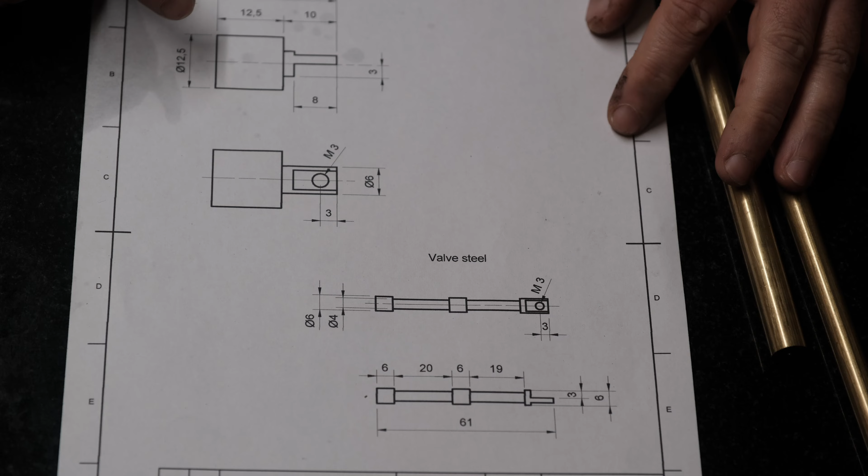Piston, valve, got some brass, let's build it.

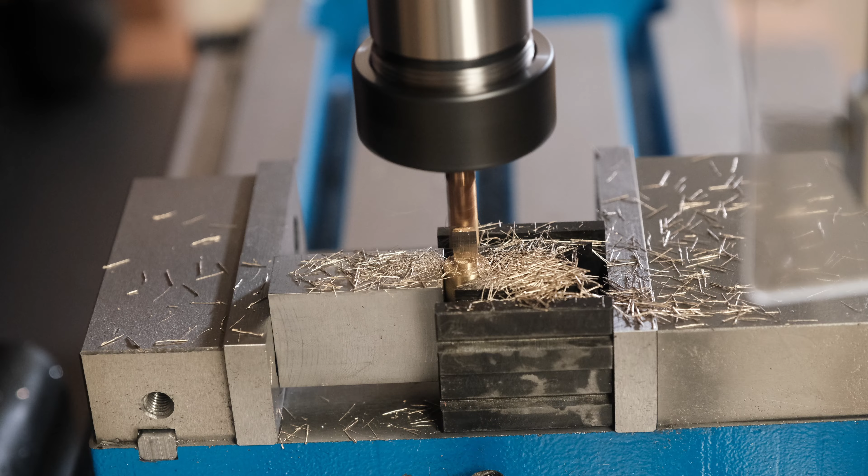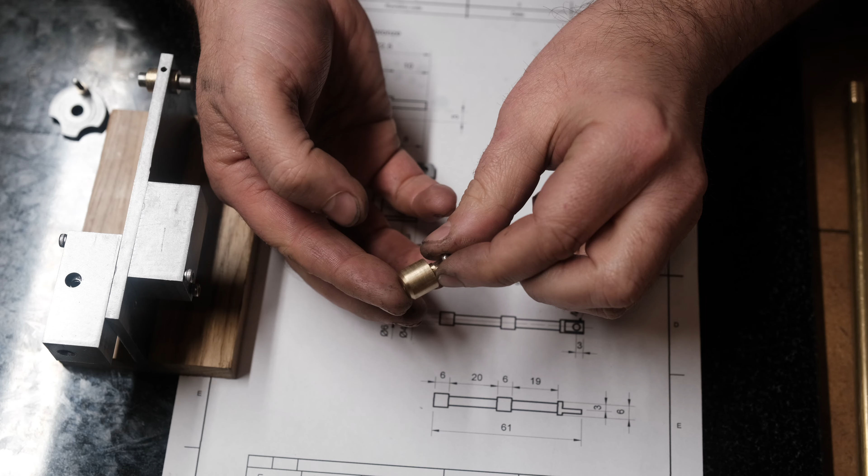So I just need to side mill half of the 6 millimeter diameter down to 3 millimeters directly in the middle. And then I'll just make the other side a flat edge as well. So let's do that now. So now I just need a 2.5 millimeter hole for an M3 thread. Piston's looking good, seems to work okay, fits in the bore okay.

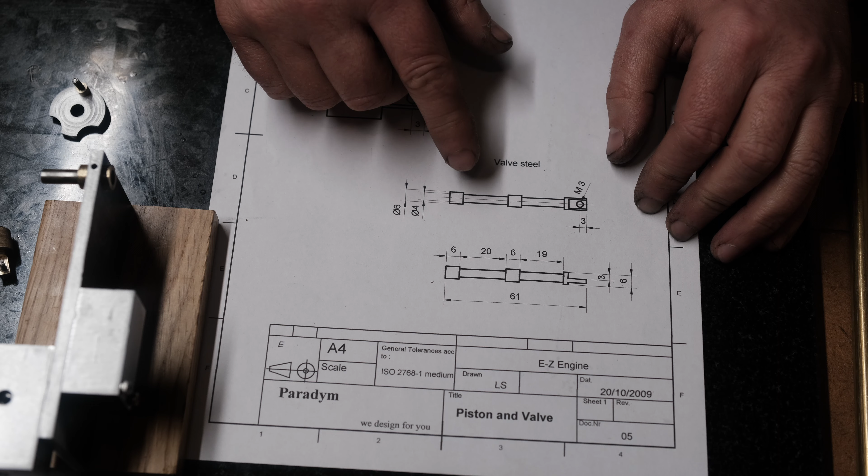So the next piece we have to do, the final piece, is the valve. It says to make it out of steel, but I'm going to make it out of brass just because of the colour I prefer. It shouldn't make that much difference to a steam engine like this. So let's jump on the lathe and we'll cut this out. I need to be quite accurate with the dimensions on here.

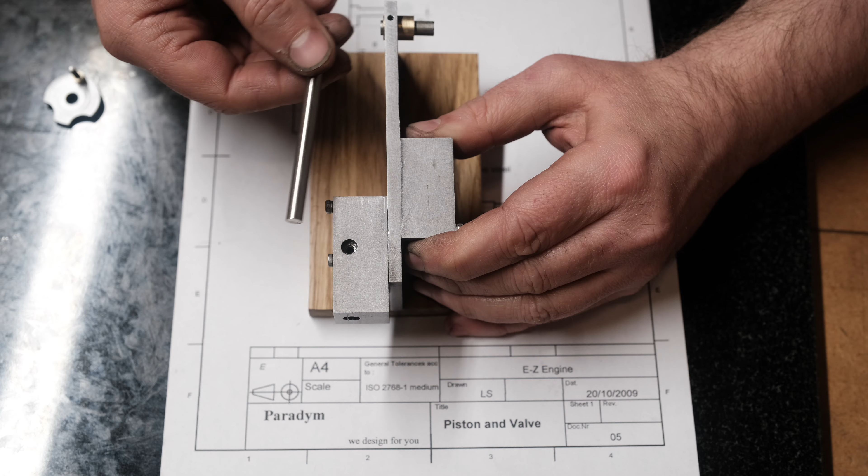Actually, a slight change of plan. I'm not going to use brass. I'm going to use one of my stainless steel rods. That'd be perfect for that. And it fits perfectly in there. This is already a 6 millimeter rod. So that's going to be a lot easier, and it's already polished, so it's nice and smooth.

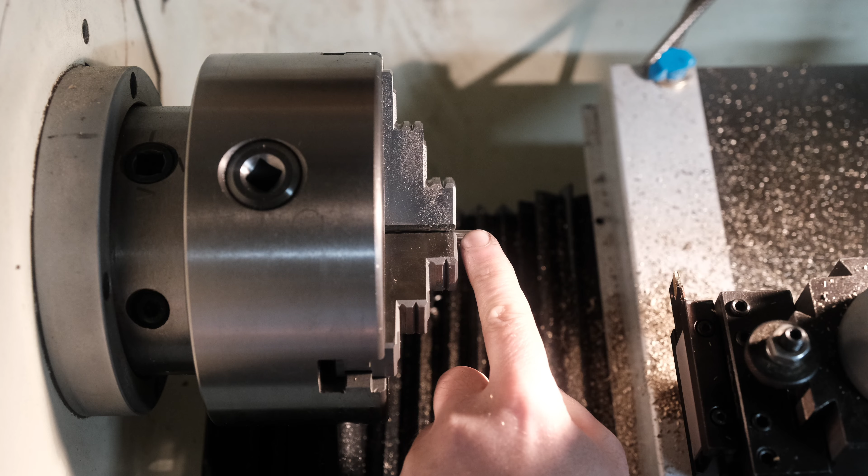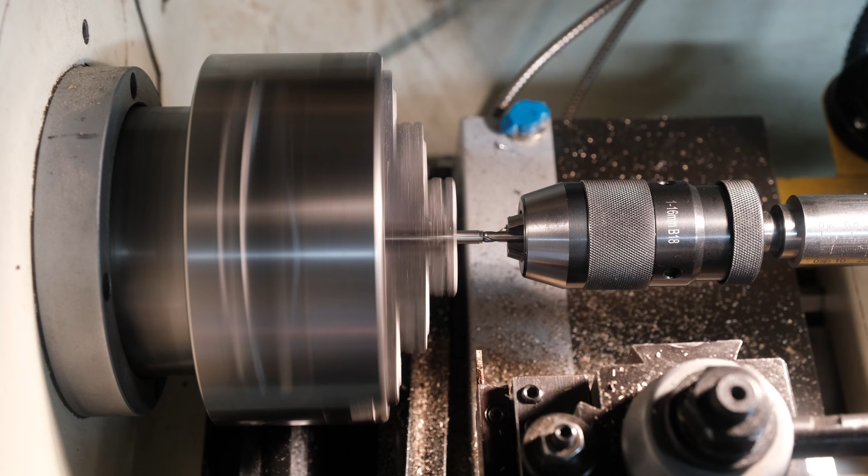So this actually needs to be 61 millimeters long, and that's way too much stick out. So what I'm going to do is put a center in it, and I'll try and do everything in one go, but with a center, because it's going to be hanging out here. I'm going to try and do this with the parting tool just because of the straight edges on each of the barrels, but there's a lot more stick out than I would have liked to make room for my centre. I can't get close enough otherwise, but I'll just have to do it like this, and then I'll clean up the end later.

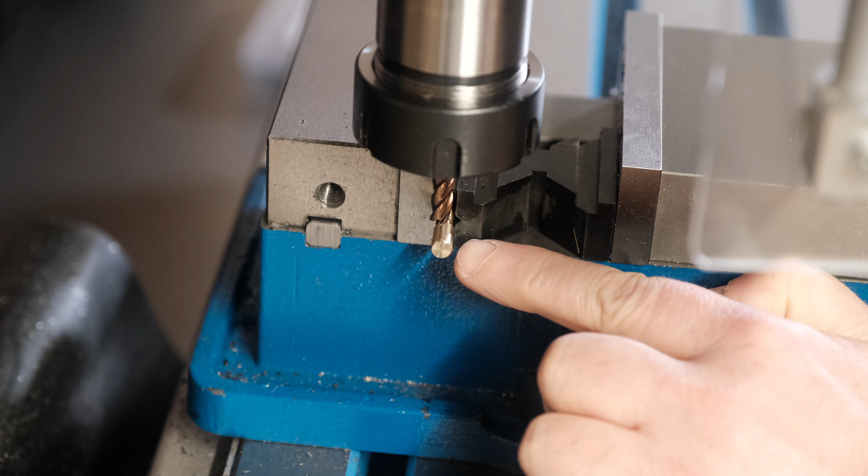So you may notice I've changed to brass rather than stainless steel. I'll explain that in a minute, but what I'll do is I'll just put the flat edge on this and put the hole in, so let's do that.

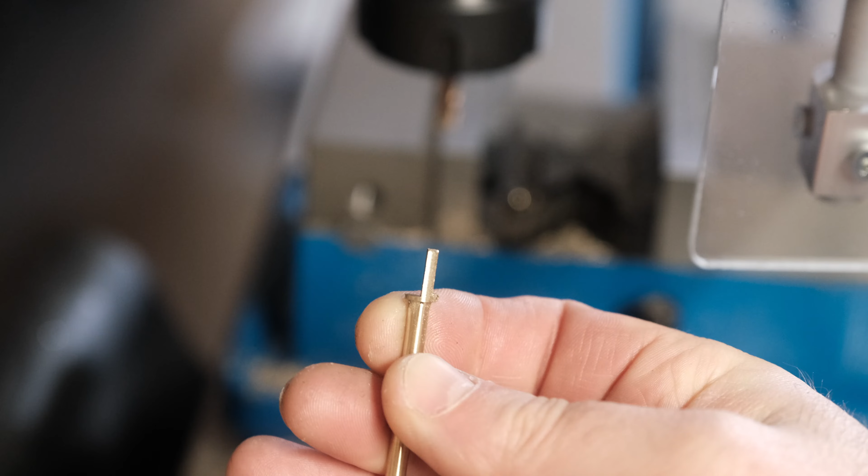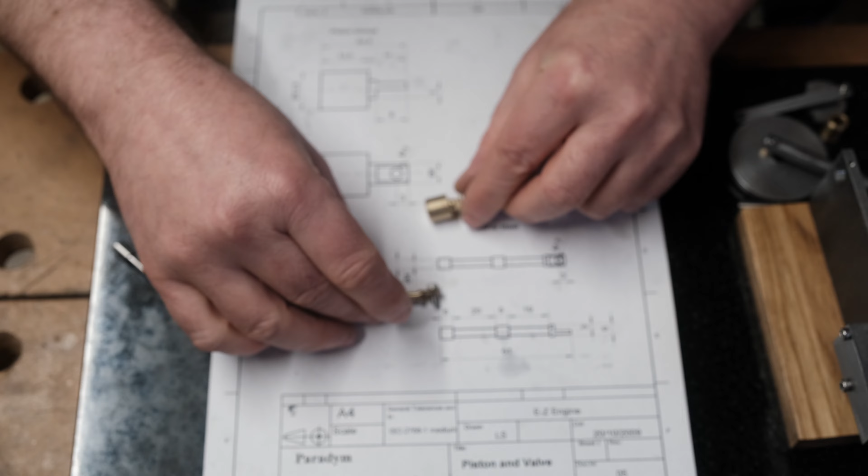So I've completed the valve and the piston. These are looking pretty good. They fit really well. I ended up going for brass in the end for the valve. And there's a specific reason. I always forget. I'm not very experienced with cutting stainless steel. And I think it just work hardens too hard and it just causes odd mistakes and it starts to bend and it just doesn't cut very well.

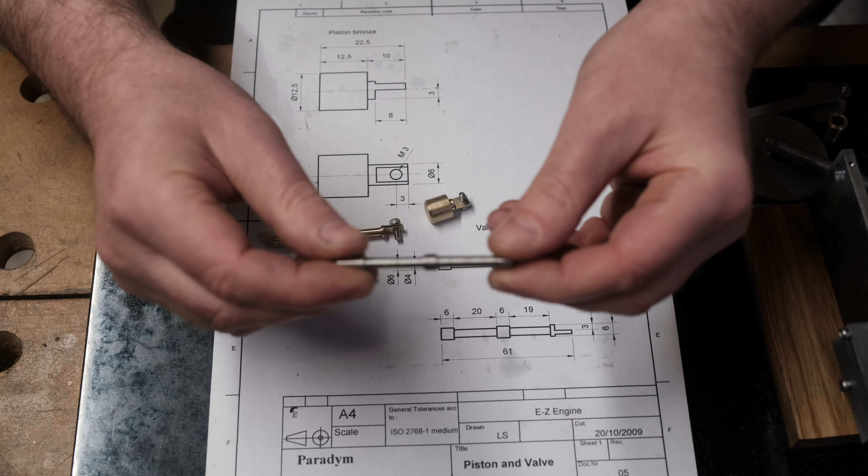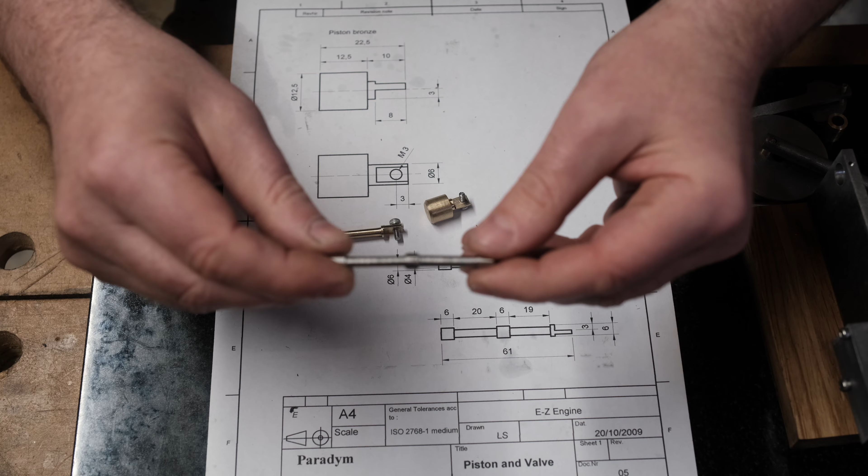What I've found is when I've been practicing stainless steel, it's always much easier to use bigger pieces and take deep cuts relatively quickly, just so it doesn't seem to work harden. I think that's what's happening because you start cutting and it seems really easy and then literally within a second or two, it just suddenly doesn't want to cut anymore. So I think that's work hardening. But if anyone knows for sure, let me know. So I gave up with the stainless steel in the end. I wasn't happy with the finish. So I just made it out of brass and that works perfectly fine.

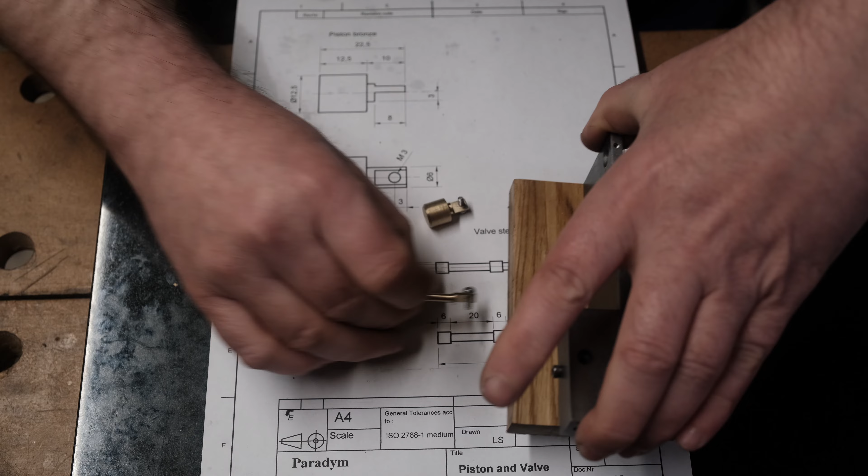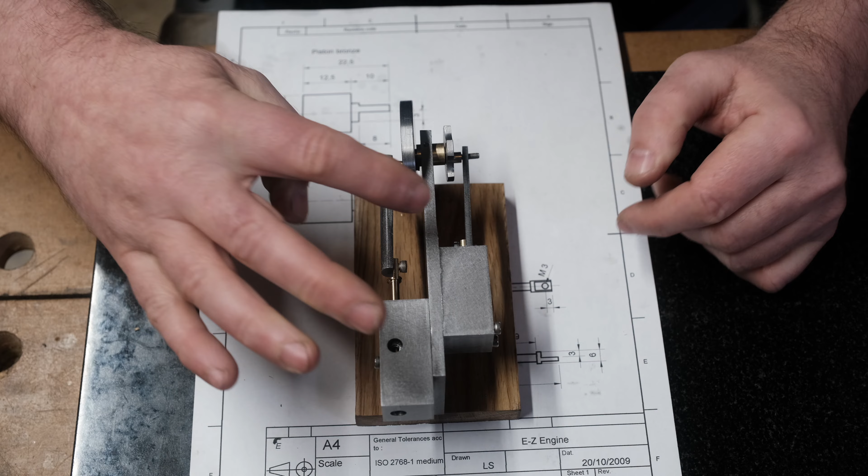So what I'm going to do now is we're just going to assemble everything we have just to see what it looks like. So let's do that now. Okay, so it's looking really good. I can immediately see my spacers are too big, obviously because I've used a thinner body. I think I need to just do some fettling to get this absolutely accurate.

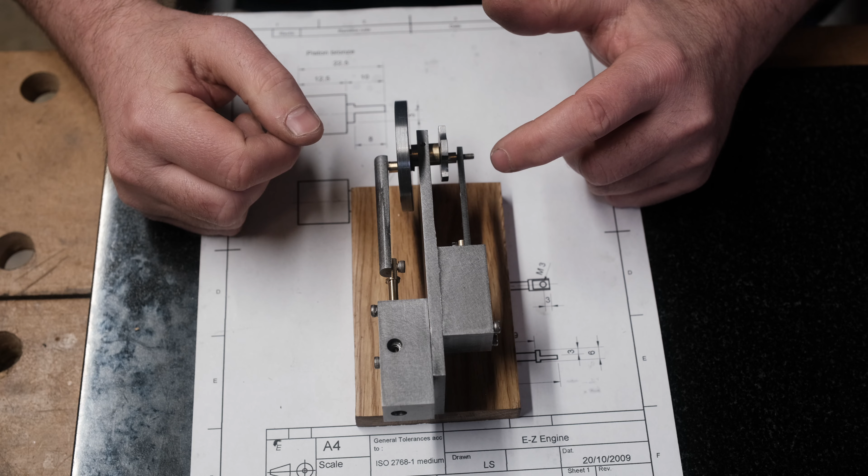What I think I'm also going to do is I might possibly drill an M3 thread into there and use a grub screw to hold the flywheel onto the crankshaft. And then I'll glue the actual crank on. And that means I can always readjust it to try and get the timing right. As far as I'm aware, this has to be 90 degrees. But I'll just read the instructions in the next video and we'll assemble it properly and give it a test run. But for now, I'm pretty happy with where we are at the moment.

Everything seems to look pretty good. Everything seems to move correctly. So it is looking very good. I'm really pleased with it at the moment.